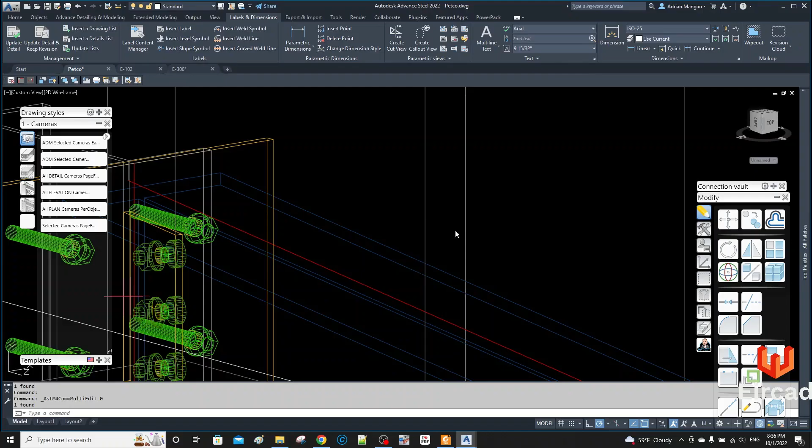Hello, this video is covering mistakes that you can make while numbering.

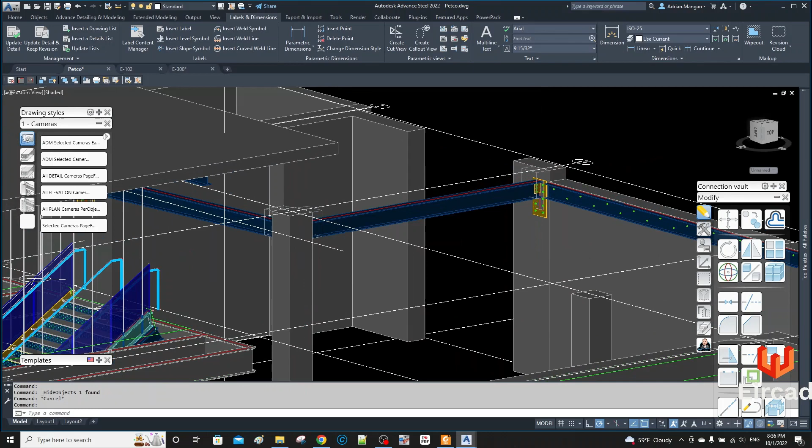It's always advisable to just number all the time. At the start, I know it can feel like you don't want to number because something's going to change, but if that's the reason you're not numbering, that's the reason you should be numbering, because you don't want to have mistakes like that.

So basically, I have all these plates, and most of them were all like this with 4 bolts. This is actually a beam behind, which I have set to not show and should be set not to be used for lists or anything. It shouldn't really be used for collisions either.

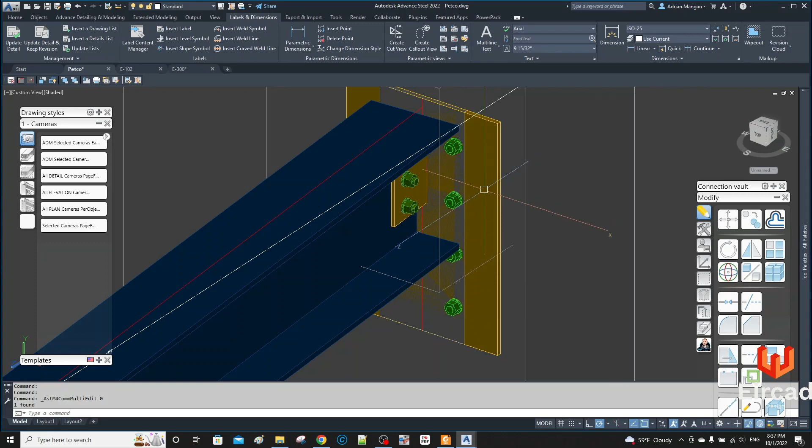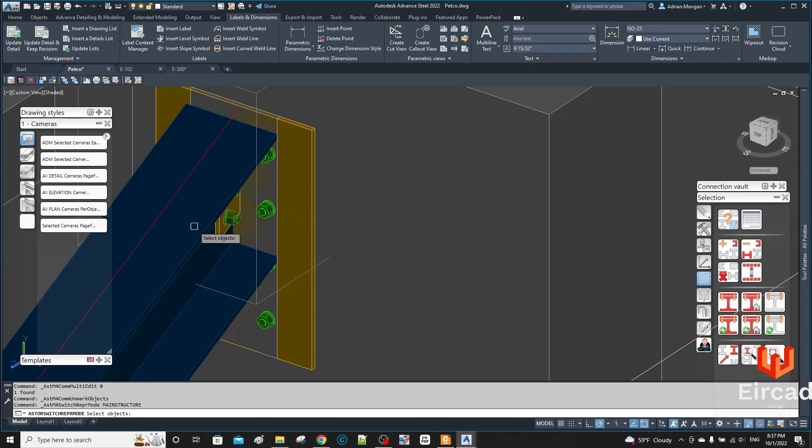But this plate here was numbered P1, so that's fine. And if we go and check another one that's similar, naming P1 - these are different angles, but these plates are all numbered the same because if I check, we should see... actually, that's something I need to change.

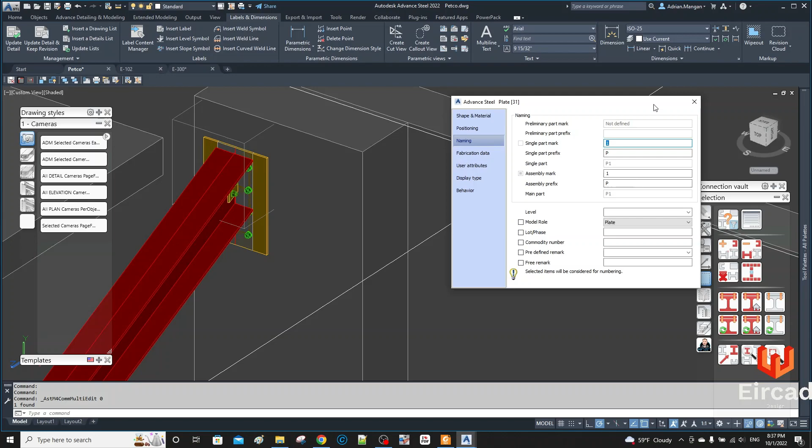So the guy wants to install these. So that's another mistake, right? If you see, these are P1. This one is a straight one, and this one is a diagonal one, and they're both P1s. So that's also a mistake.

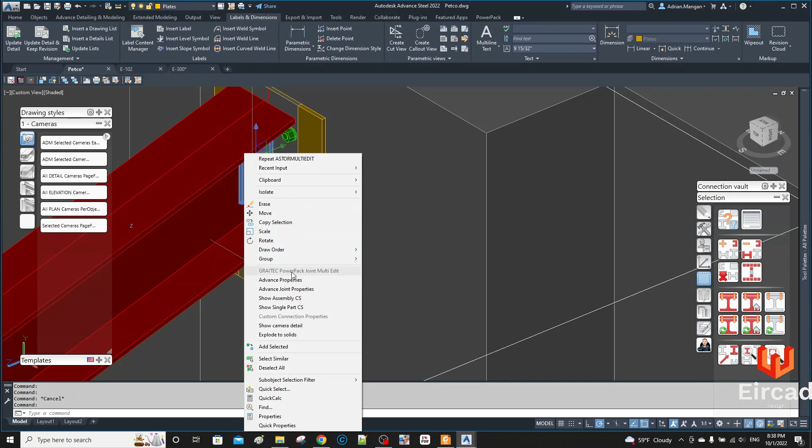So basically the problem we have here is a couple of problems I'd forgotten about. He decided he wants to now attach this to this. So what we're going to do is I'll end up coming in here - and actually this one is not attached to the plate either, right? If I check it, it's actually attached to that beam. So that's why the numbering worked, because I created this attached to the plate.

So basically I'll have to go back and change these welds here to be site welds and change these bolts to shop bolts, and then I'll have these on the assembly drawing so they'll go to field with hand tight bolts. But anyway, get on with the numbering, wasting time.

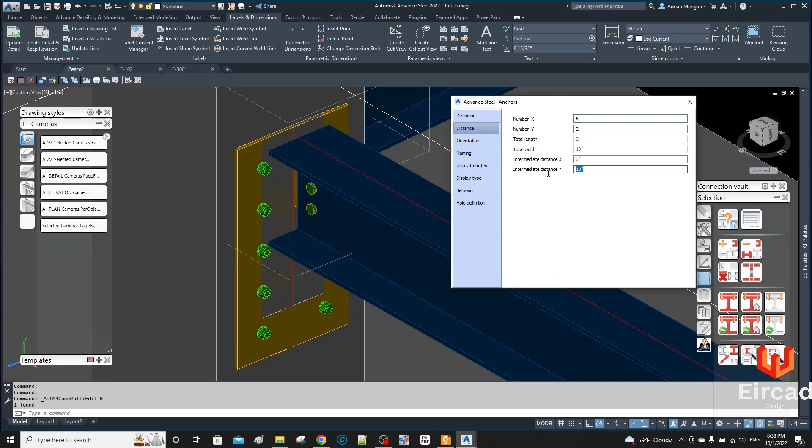So what I've done is I've extended these ones down, and they wanted an extra bolt in these. So the bolt center should be 8 inches. Let's just check - it's not. So this should be 8 inches. We're almost getting a clash there, but it's okay.

And this one here is at 8 inches already, right? It's at 10 inches also. Oh, is it 8, 5, 5, 10? Let me have a look. This is not it. I think it was 5 and 5 and 1 foot 6 is 18, is 10.

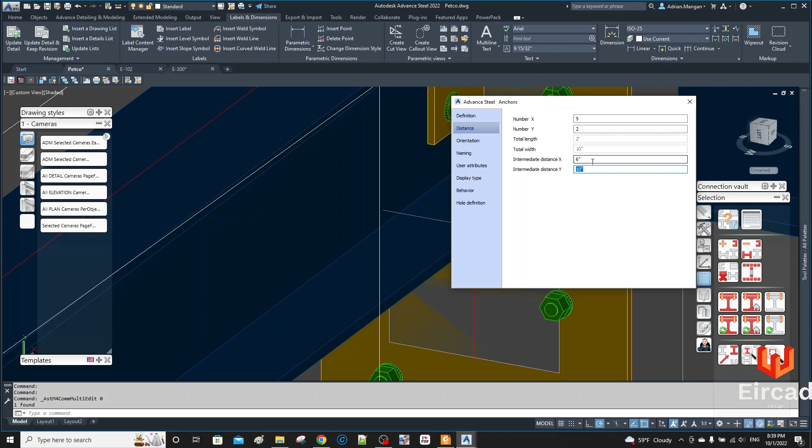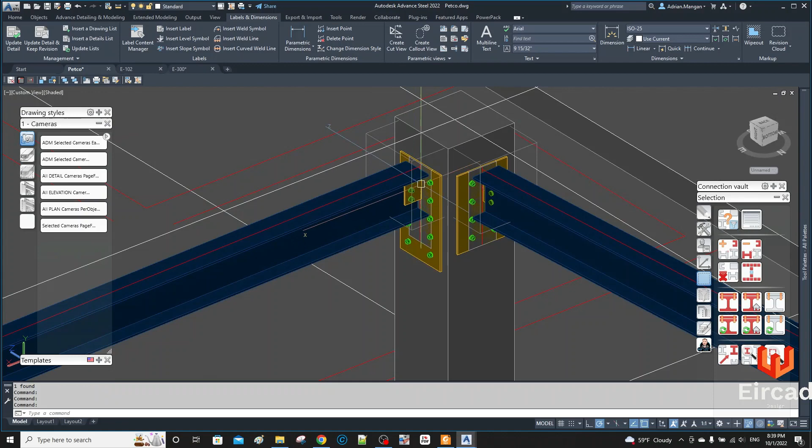You know what, I'll leave it at 10 for now. I can change it in a minute if I have to. So, sorry, dragging this out a bit. So I'll make this 10. So these two are the same - they're different to all the other ones, right? Basically, and this one here, it's P1. Alright, that's good.

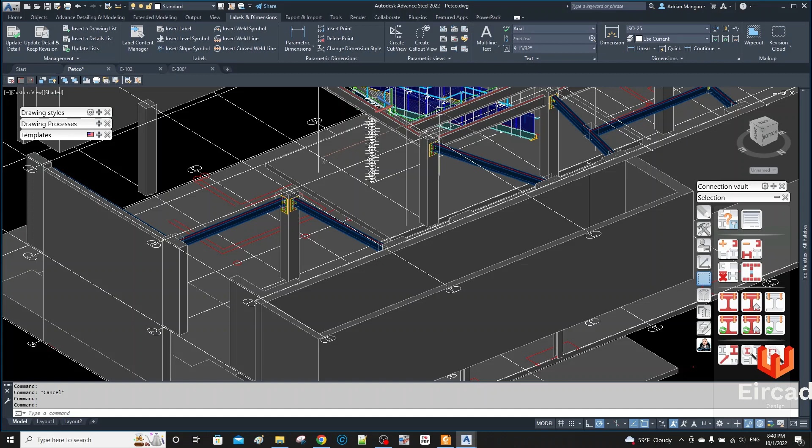Alright, so what's going to happen now is this one is a P1 and this one is a P1, because I numbered them previously and didn't renumber them. So what we want to do now is number all these. I also have stairs here which I don't want to number - this was literally just drawn up to give them some sections, but it's not the correct run and not the correct elevation. So I don't want to number any of that stuff.

So let me go in - I should have something saved in here for the numbering. Project Explorer. Steel. So I should really be more specific with that. Select elements - you can see it's all the elements up here.

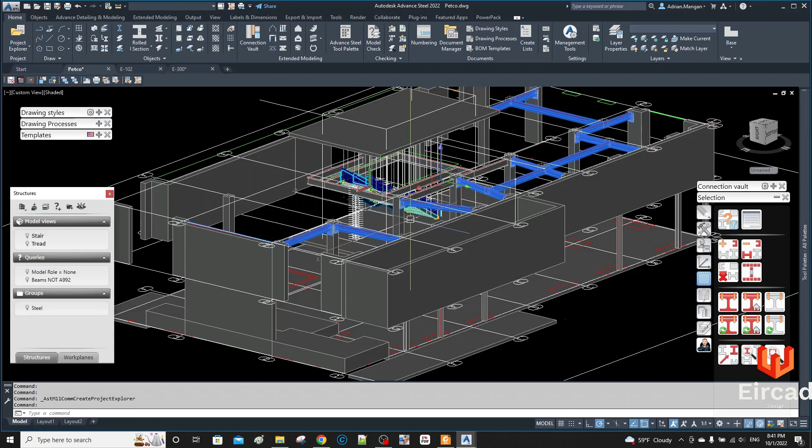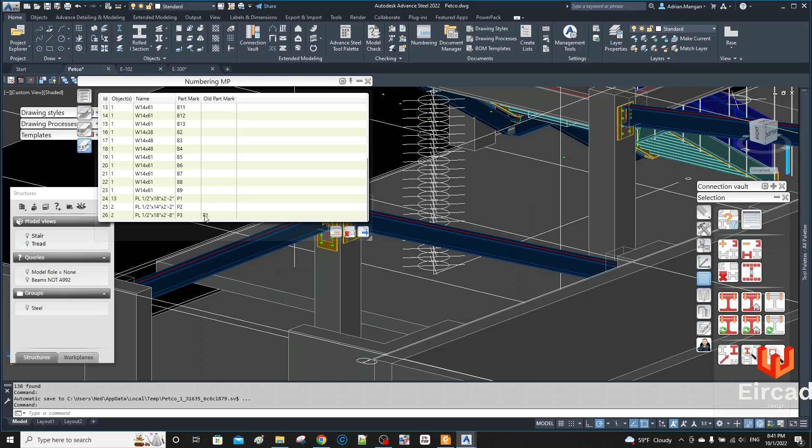So let's zoom in here and then we'll just number. One thing I like is it will show you here, so you can see these are all the beams I have inside the concrete to create the connections that I'm not using. And then we have B1, B10. If we scroll down, we see we have - there were already P2s, let me see where they are.

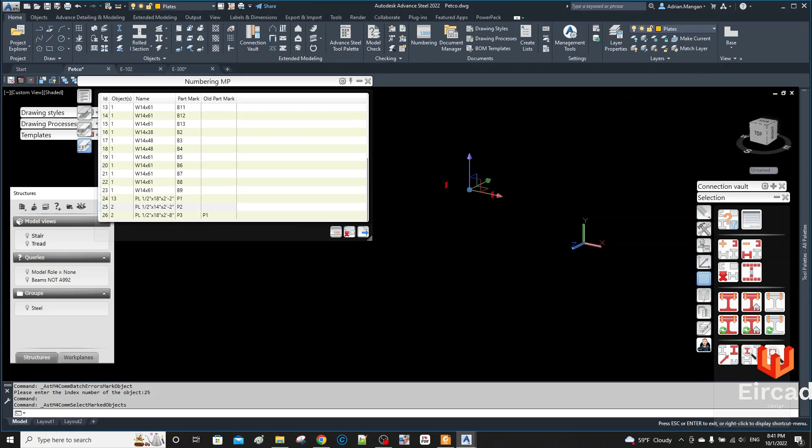So the P2s are over here. They're different ones for this concrete. That's fine. The only ones that have been renumbered are these P1s, which have been named now P3.

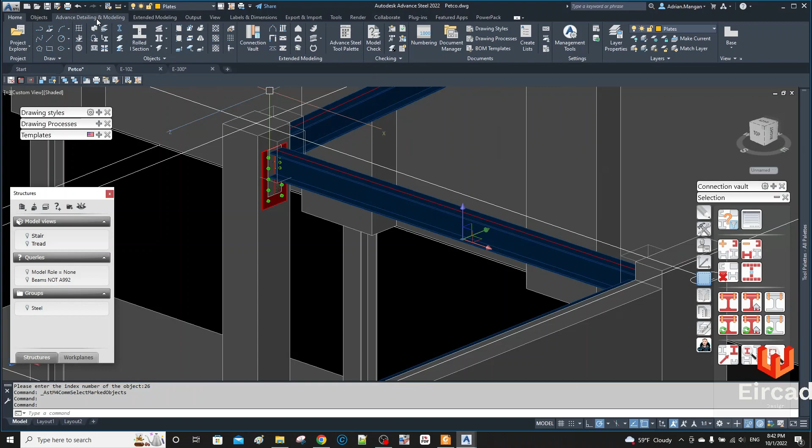So if I select where they are, we can see those are the two that I just changed. So if we didn't change them, let me see what would have happened. Let me just go back.

I'll go back out of numbering just to show you. Okay, I think I need to go back more, do I? Yeah, alright, let's see what we got there now.

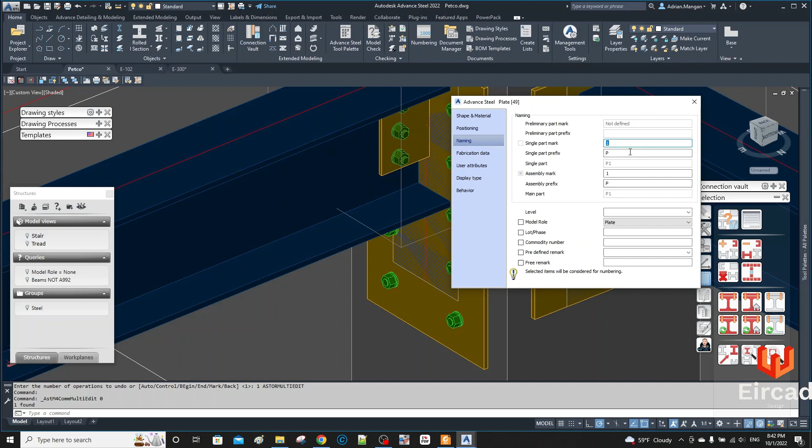P1, alright, so these are the same. So now if we go in here and go to a single part on a B drawing, let's see what happens.

Now what's going to happen is this most likely is going to have a weird number, or it's going to be a mess up in the list. Show part detail.

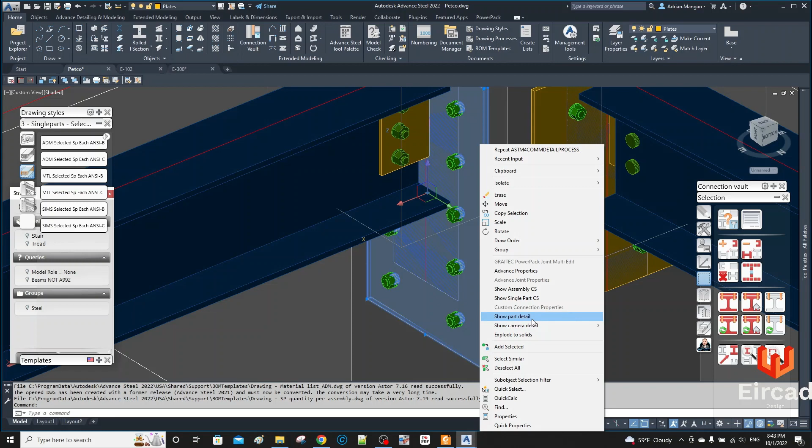Alright, for one it's too big, so we need to go in and change the scaling on that drawing. We can see this is half to 1, and it's using 4 single part plate.

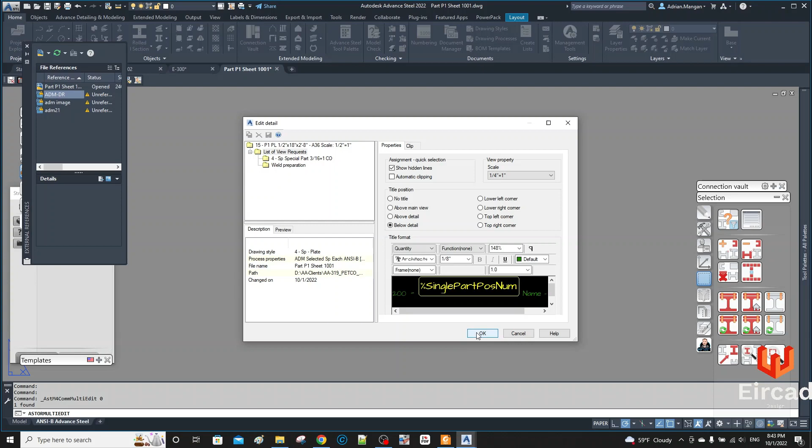So I really need to create my own drawing style for that plate. And let's come down and let's see what we got.

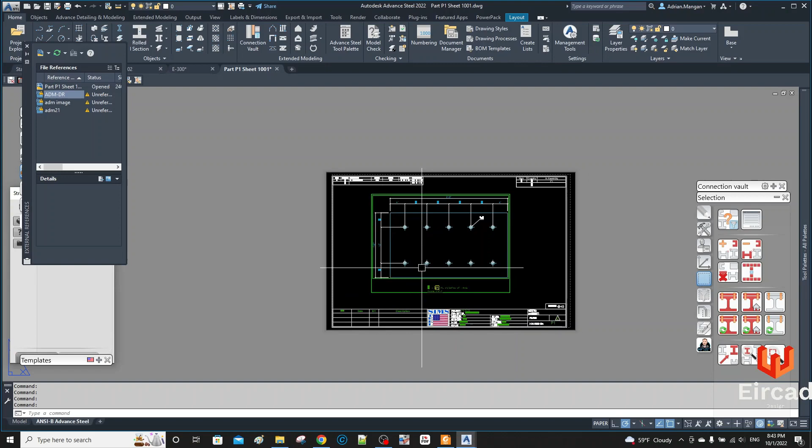We got 15 plates, so that's fine. The number is right, because we had 13 and 2. It's 15 plates, but you can see these plates have 5 holes and 5 holes, 10 holes total.

Let's detach these. These are actually files that are attached to this prototype. This is my laptop, I have to fix that.

So if I go back here to the model, there's 13 of these, but these ones have 5 holes and these ones only have 4 holes. So 13 of them only have 4 holes, and 2 of them have 10 holes, or 5 and 5 holes.

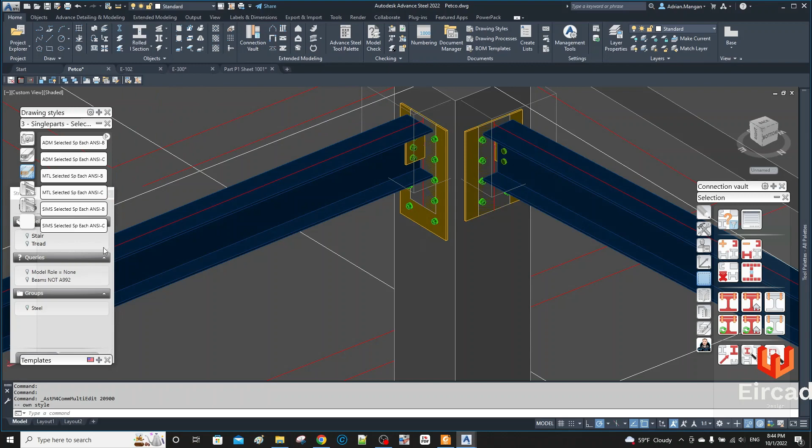So what happens then is if we go back, so I created that by picking this one. So if I go back in here, select elements, number this, okay.

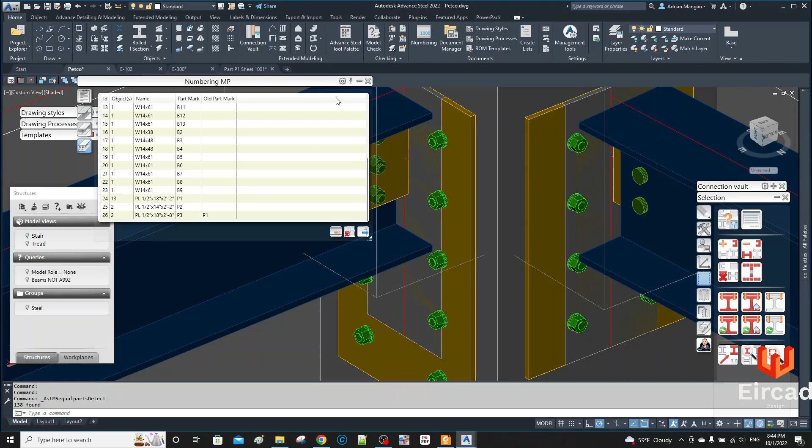Can see the same thing has happened, right? So now this is P1. So if I minimize this, just move it over here.

Let's go into this part. Now let's see if I click on this one. It's not going to show me a part, even though I created it picking that one, right? And even though there's 5 holes, because that is not the number 1 anymore.

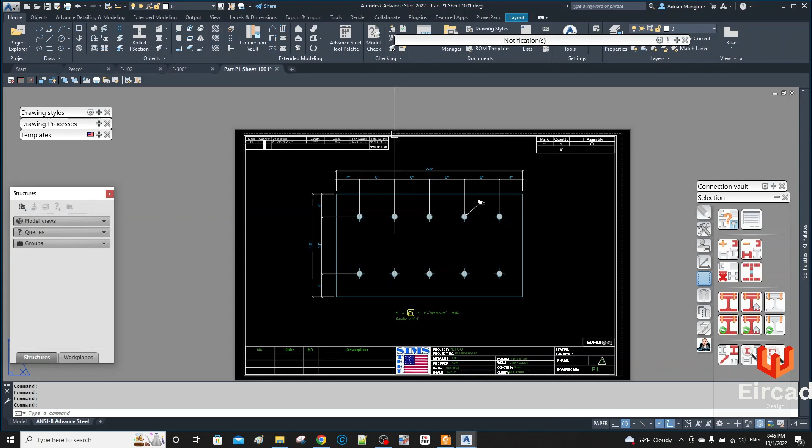If I go in here, we can see show part detail not up to date. I already have it opened, but click on this, it'll take me to it. And then we can see, let's pick this and let's see what happens when we update it.

This should change to 13 and this should go to 4 and 4 holes. Should. So it's gone to 13 and it's gone down to the 8 holes, 4 and 4.

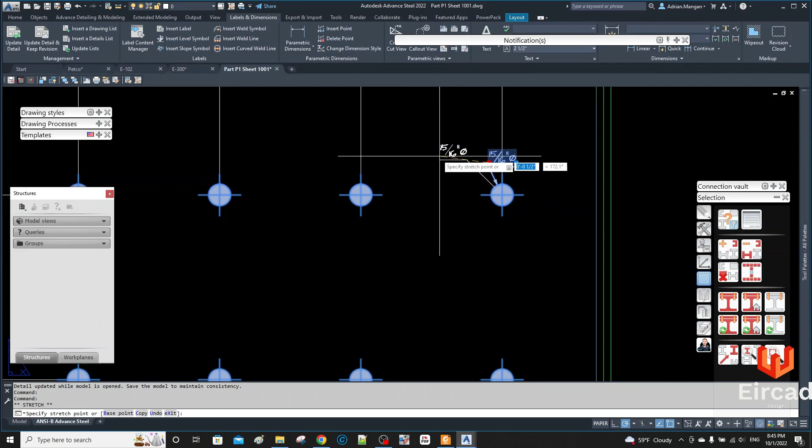So that's good. So if you update it while you're in the drawing, which some people don't like to do, I like to see my updates.

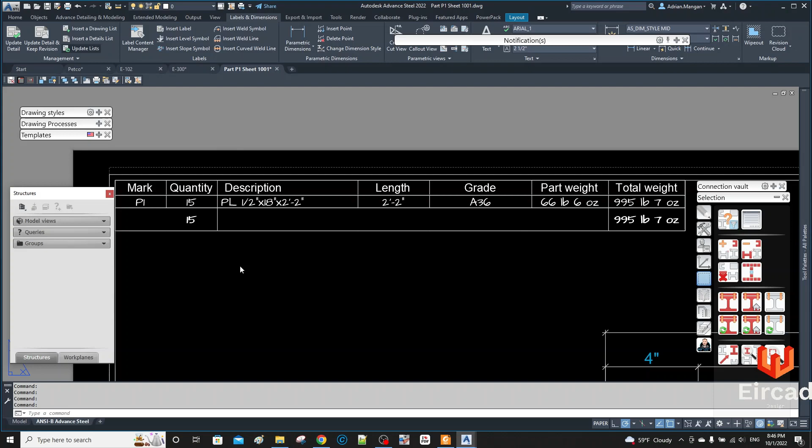If I come up here, I can see this is still 15. So go to labels and dimensions, update lists, and this list should change to 13 plates. Okay, and then over here, can see this has changed to 13 plates.

So we're now up to date with this drawing. So if I go back to the model, select this plate, you can see that your part detail is up to date. This is usually correct.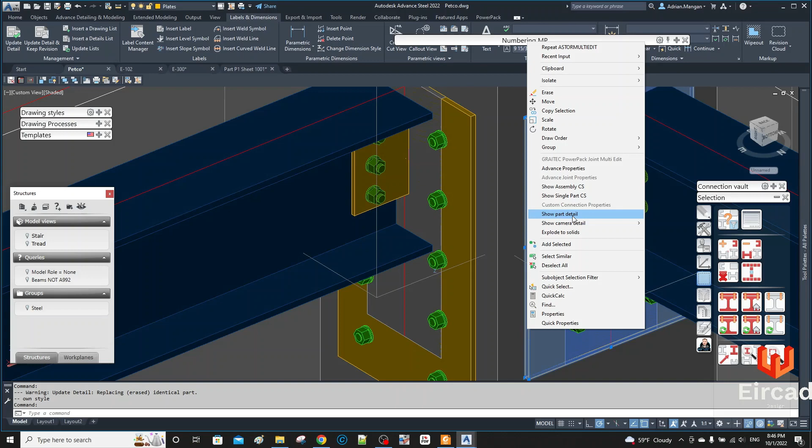Usually. There can be instances with larger drawings where you update one detail and it's showing you it's up to date, but all the details aren't up to date. But that's usually with something like this sheet here.

So now what you want to do is go back to the model and go back to this one that you originally created the detail from. And let's go to the same thing again.

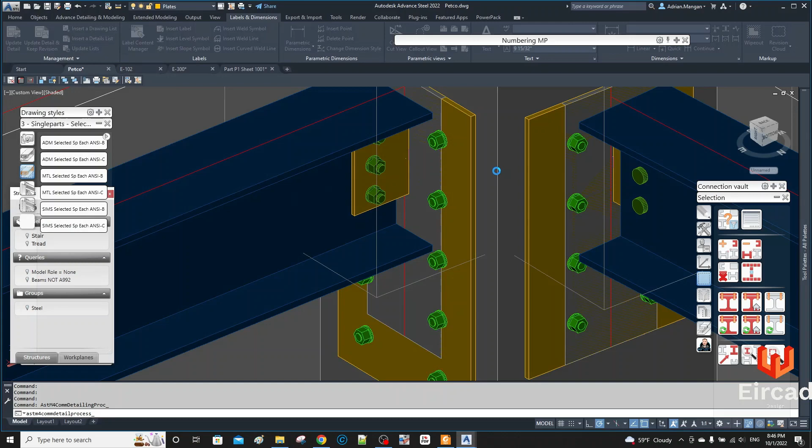Okay, and that's going to create the part for that. And then we can go back in here, show part detail. And then we can see we have the same problem here, right?

So I'm actually going to fix this problem right now. So you can see there's 2 and there's 2.